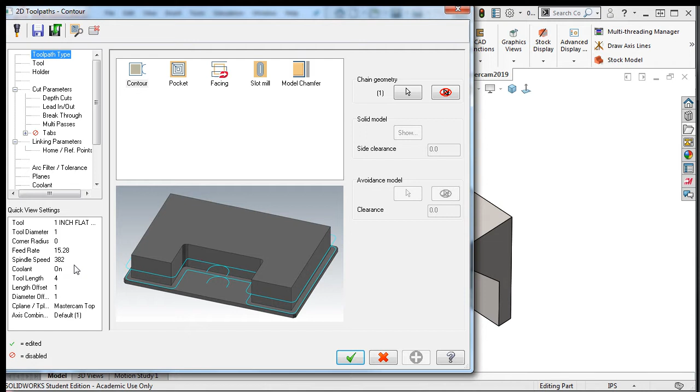Currently they are identical. I can select the parameters for this second contour toolpath and edit them to suit the finished pass. I'll select the Tool tab and then add a second 1-inch end mill the same way I added the first one. I'll select Library Tool, and I can see that the 1-inch library, tool number 297, will be in the filtered search results since it's the last tool I looked for. So I'll select it and accept this selection.

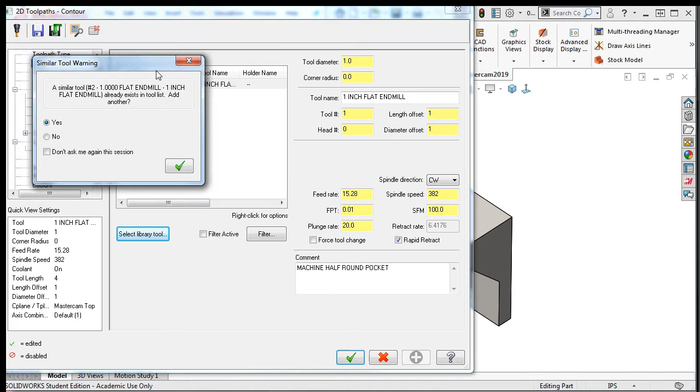I'll receive a warning that a similar tool exists and Mastercam is asking me if I wish to add another. I'll leave the Yes radio button enabled and accept this because I do want to use two 1-inch end mills, one to rough the part feature and one to finish it.

If I'm only making a few parts, it won't be necessary to use a separate end mill to machine the finished pass. But if I'm making more than a few, I'll want to use a separate tool to finish this feature because the finish tool controls the final feature size and all related geometric dimensioning and tolerancing.

Since the finish tool is cutting less material, it will last longer than the roughing tool. Therefore, my feature sizes and GD&T will remain in tolerance longer than if the roughing tool cut the final part sizes. Now I'll change the finish feed rate to 6 ten-thousandths of an inch per revolution per tooth, and the comment to finish large half circle.

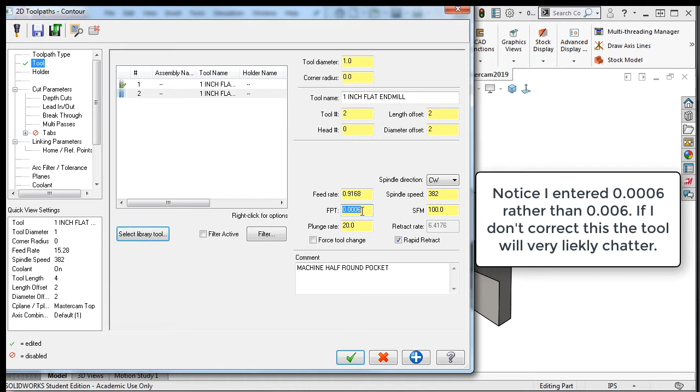The finish pass feed rate will directly relate to the surface finish of the part. An easy rule to help determine what the finish feed rate should be is that whatever the desired surface finish is in microinch, move the decimal point to the left 4 places to obtain the feed rate per tooth.

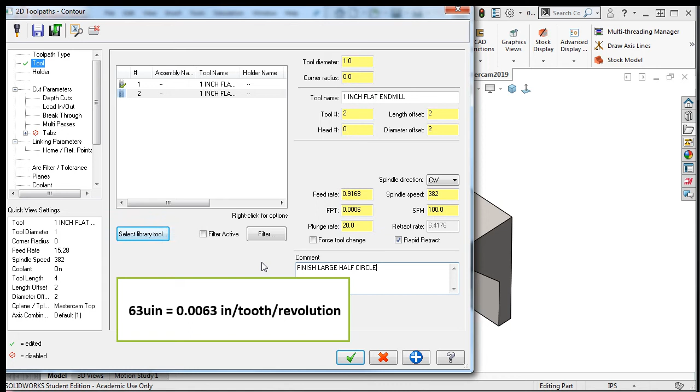For this example, for a required surface finish of 63 microinch, I would set the feed per tooth to 0.0063. For a desired surface finish of 125, I would use a feed per tooth of 0.0125. This is only a starting point, and the actual surface finish will vary depending on the rigidity of the setup, the machine, and cutter condition, but is usually a good starting point.

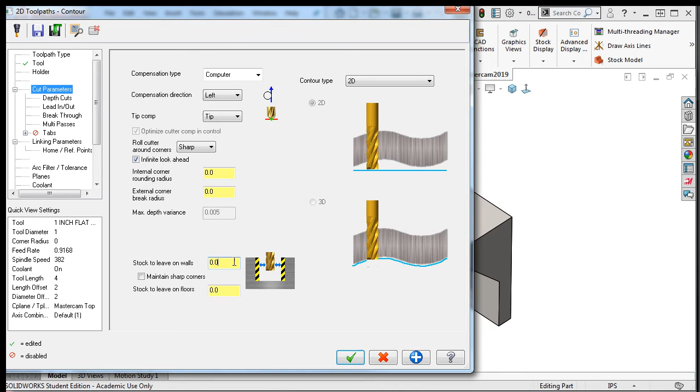Selecting the cut parameters, I'll remove the stock to leave on walls so that it now reads 0. I'll also disable the depth cuts by unchecking this, and I'll disable the multi-passes by unchecking this checkbox. The remaining settings will be good for this tool, so I'll accept these changes and exit the toolpath settings.

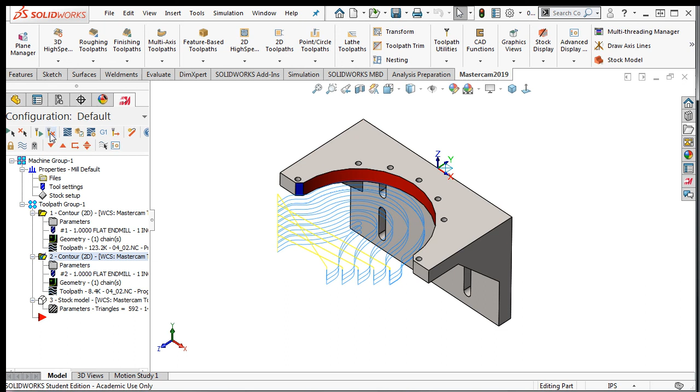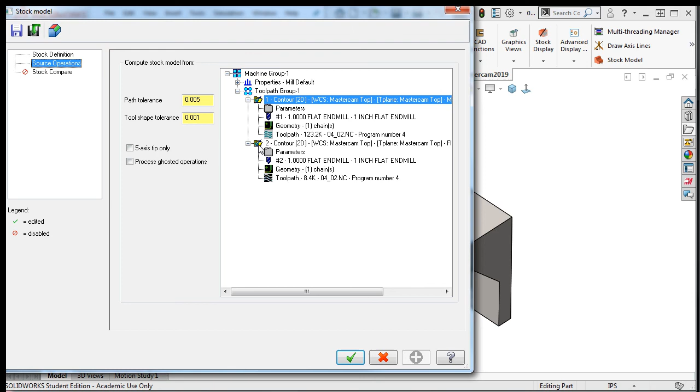The red X through the toolpath reminds me to regenerate the operation by selecting Regenerate All Dirty Operations. I'll turn the cut lines of the first contour toolpath off, and now we can see the cut line for this contour toolpath. Lastly, I'll alter the stock model to include both contours. I'll hold the Shift key and select Contour 2. Exit the window and regenerate the stock model.